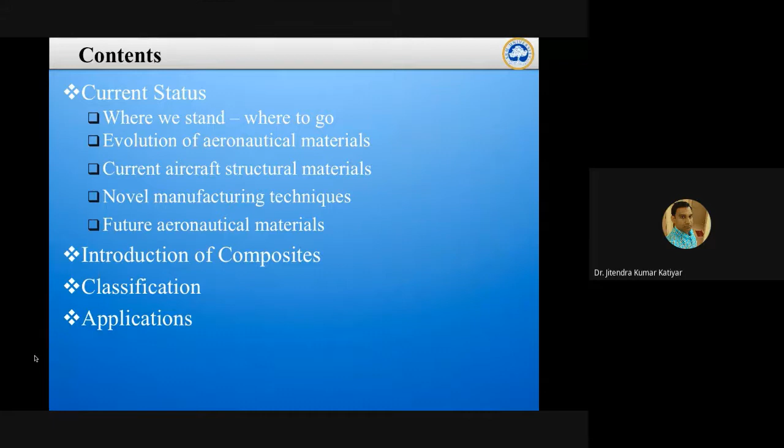So because of that reason, for this whole webinar or whole topic, I have decided on the basics of the advanced composite materials. So what the different firms are doing according to the environment also plays a very important role. We are basically moving nowadays toward the sustainability aspect or green environment, you can say.

So whatever goal we have set in 2000, according to the 2000, what is the vision in present? Our vision set in 2000 is that we can reduce the fuel consumption of the aircraft, and also we can reduce CO2 emission, because the environment is polluted. Otherwise, more CO2 will go into the environment. So that was the vision set for 2020, and as per comparison with 2020, we are in the position to at least reduce the fuel consumption and CO2 emission by 50%.

So every 20 years we have set the goal, and we have worked on it to achieve that particular goal. Like in BTech also, when you enter mechanical engineering, you have some goal. Either you want to go for higher studies, or you want to go to core companies, or whatever goal you have set. How much you have achieved after final year, that is up to you. When you sit alone and analyze yourself, how much percentage you have achieved. It will not be that you can achieve 100% of whatever goal you have set. If you have achieved 50 to 60% also, that is also a very good achievement.

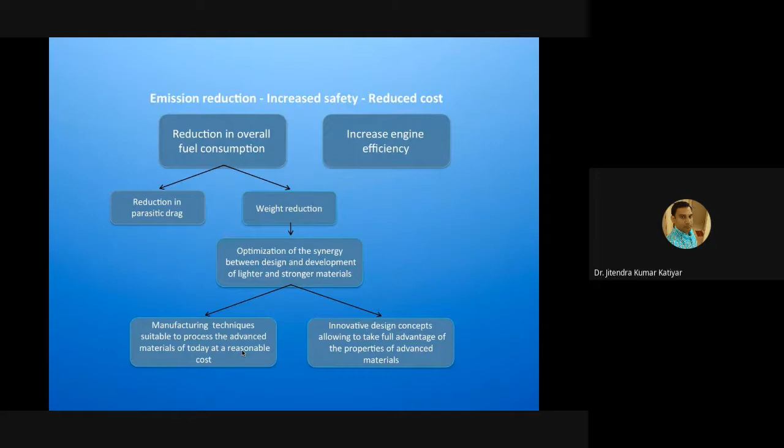And also we can talk about the material. So material science is a very important aspect in the selection of material.

Like the aviation industries, what they have decided from 2005 to 2050 is they set a goal for how much they want to improve. You can see here that we analyze per year the international aviation fuel burn, and we are targeting to at least reduce fuel consumption in that particular era.

This is called the blue solid line - it is a baseline which is fleet renewal. This green dash is the contribution of technology improvement - how much technology has contributed to developing material, design, and manufacturing process. That also plays an important role, along with the contribution of improved ATM and infrastructure used.

So ATM is air traffic management, and infrastructure which is being used - that is the solid line. The dash line is the 2% fuel efficiency aspirational goal. So we are not targeting very high, but achieving this 2% fuel efficiency is a very huge task.

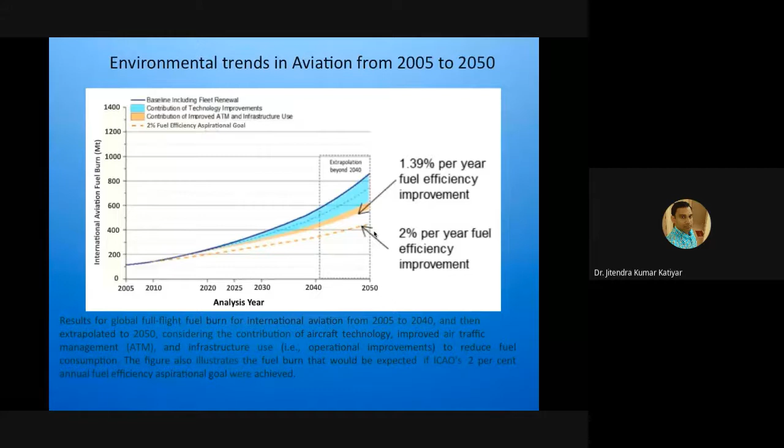Then another aspect is how much CO2 emission we are working on. This is the minimum gap into 2040 or 2050 - at least we can reduce the CO2 emissions. So the range of CO2 in that particular era is that dash line, which is what we are achieving up till here. We are targeting to at least cope up with the same.

How do we calculate CO2 emission? It is calculated by 3.16 times the fuel - how much fuel is combusted in that particular engine gives you the CO2 emissions calculation. So a minimum gap of CO2 emissions is required, and we can calculate accordingly and target in this range to further reduce CO2 emission.

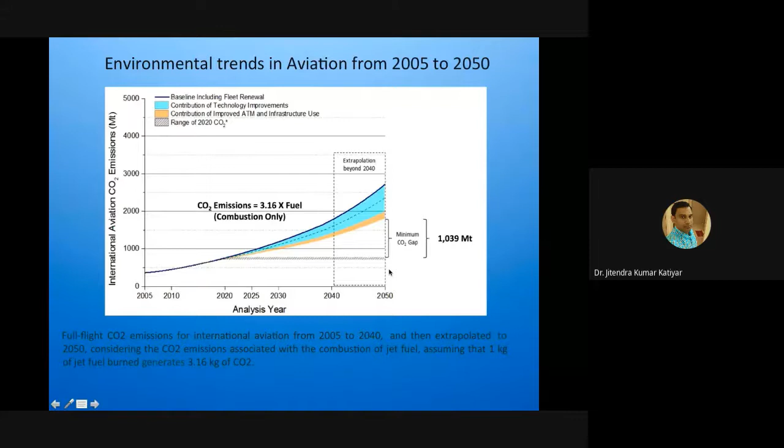So NOx emission follows the same trend - we want to reduce it up till 2040. This is an international aircraft full flight NOx, and we are going to also think about that one.

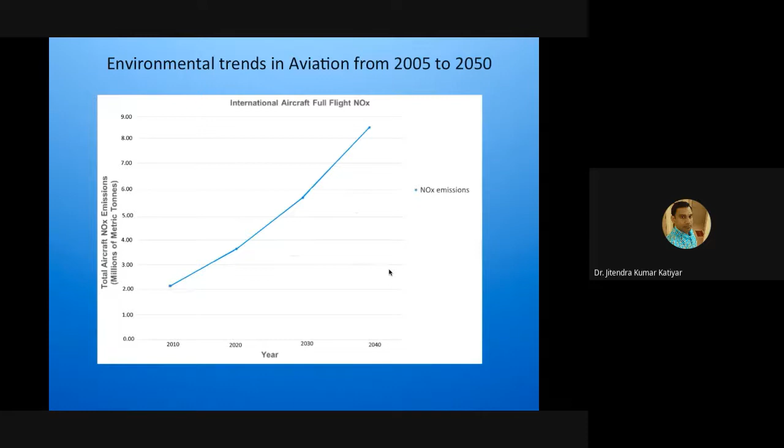So what is the flight path, objectives, mission and vision? Because each industry in the international aviation industry has its mission and vision, and to achieve those they have set environmental goals and safety goals. What they have achieved is 75% reduction in CO2 per passenger kilometer and 90% reduction of NOx.

Noise pollution is also further reduced by 65%, and aircraft movements are emission-free when taxiing. Because when you are taxiing the aircraft to the runway, more fuel will burn.

In that range, they use a cart to pull the aircraft up to the runway. Some airports are adopting this, moving the aircraft from the track up to the runway so you can reduce fuel consumption. Taxiing to the runway burns approximately 30 to 40 liters of fuel in just 5 or 6 minutes.

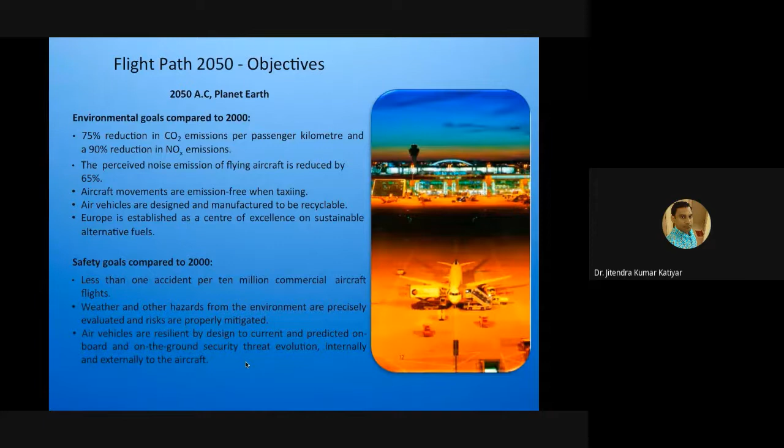These are the goals set by the International Association till 2050. Development of aero structures relies on the development of new materials with improved specific properties, like wear resistance and corrosion resistance. Lighter weight is also very important - if weight is light, you can reduce fuel consumption.

You can also develop precise manufacturing processes to design that particular nature. Specific goals include increasing the strength to weight ratio, reducing cost, and ensuring environmental friendliness. That is very important.

This picture, taken from the internet, shows a structure by nature beautifully present on a leaf - you can see some kind of flight structure there. So whatever we are learning from nature, that is the best source of learning.

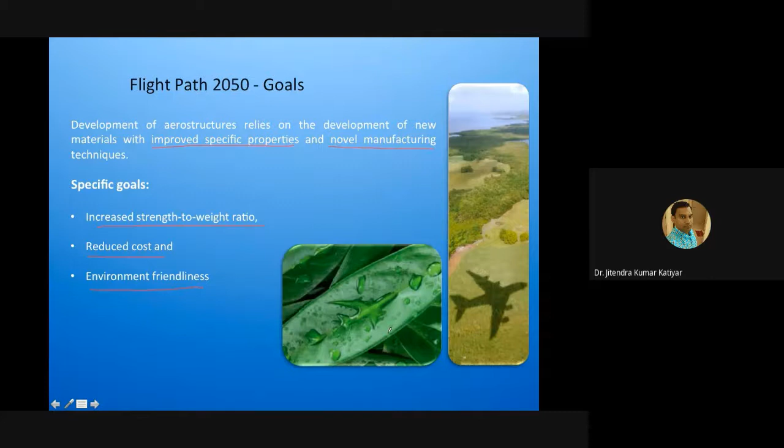Now discussing aeronautical materials - how this has developed since the beginning is very important. The Wright brothers, as you have studied, in 1903 in Ohio, USA, made the first aircraft, which consisted completely of wood, 100% wood, covered with fabric. So the first material used in aeronautical applications was wood.

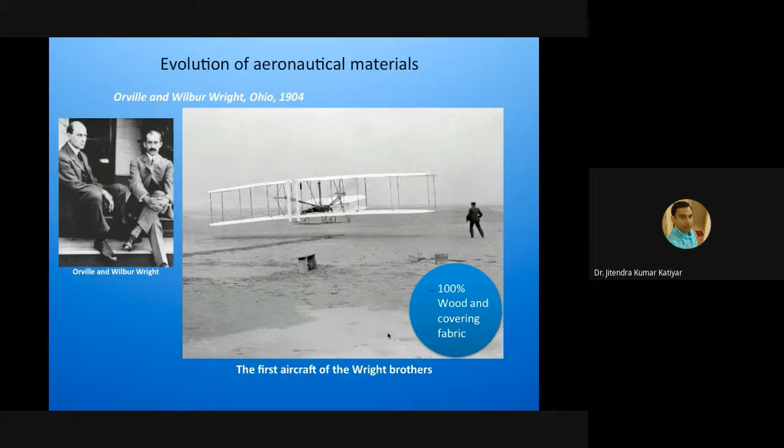So 100% wood was used in aircraft at that time. Further, because wood is not that much sustainable, during the First World War we replaced wood with steel, which provided temperature resistance and other benefits. This is the Junker aircraft, which used 100% steel. So wood was replaced, and steel came into the picture.

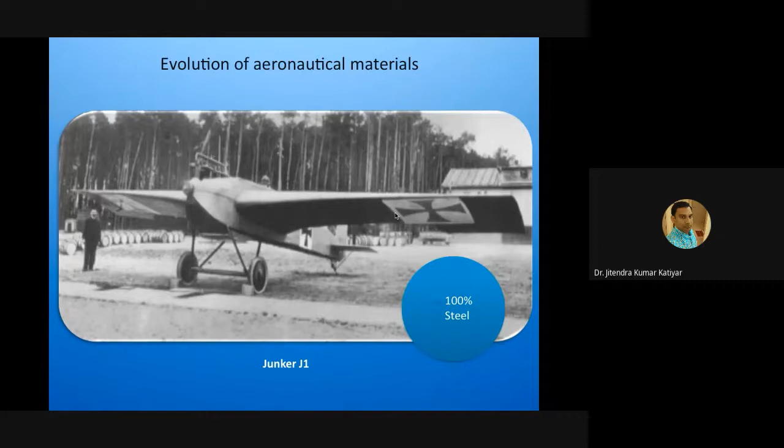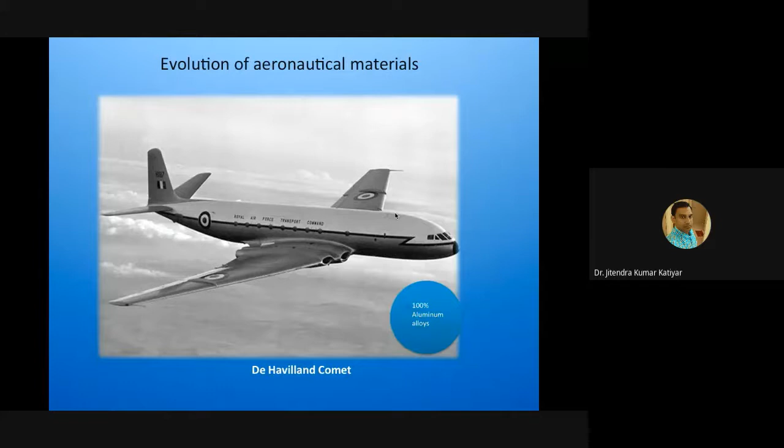You can see here an accident in aircraft Comet in 1953. Canadian Pacific Airlines crashed during takeoff at Karachi, Pakistan, and this was due to the design that was earlier there. So due to that design flaw, that accident happened. On 10 January and 8 April 1954, this led to the grounding of the entire fleet, and after design modifications were implemented, service resumed in 1958.

So there was huge human loss of life in that particular incident in 1953, because of the design flaw. So in that case, we paused these flights and worked on the design aspect, and after 5 years we resumed aeronautical services after the modified design. But we were still using aluminum.

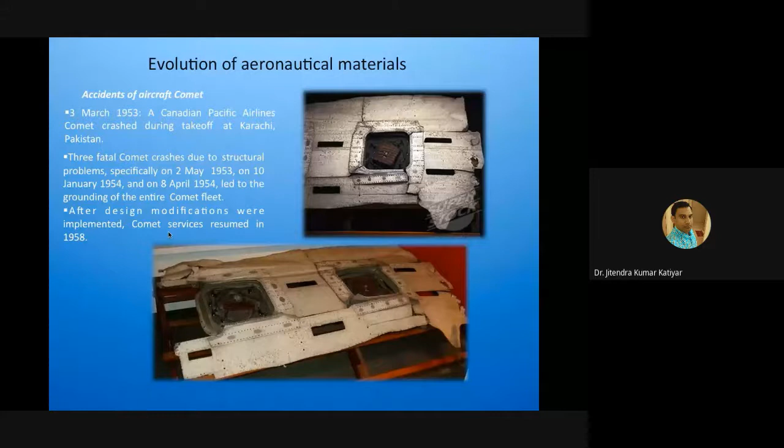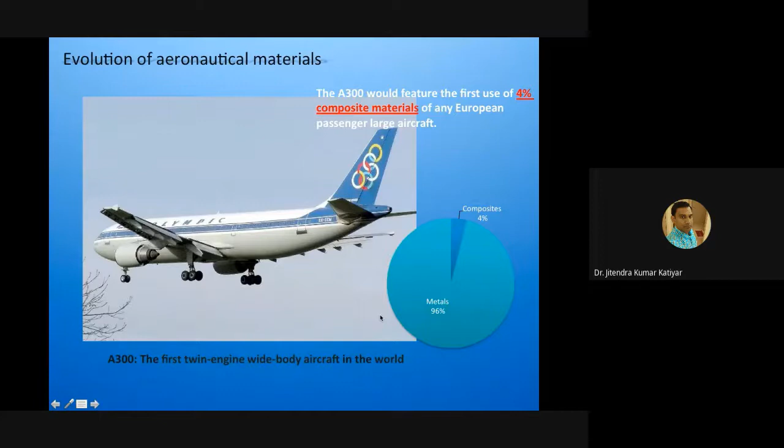Now further, the Airbus 300 came into the picture, and at that time we could reduce the metal like aluminum. So we used aluminum, but lighter because of its lighter weight, and we added at least some percentage of composite in that particular Airbus. So 96% aluminum we used, but 4% we used composite material. This is the era after 1960, where we slightly added composite material.

Further, for lightweight designs, now Airbus A320 - you have heard about that. Indigo has this old Indian Airbus A320. They are also nowadays banned by the government because of huge accidents that happened with some designs. In this Airbus A320, we used aluminum 68%. So you can see that from 96% aluminum we came to 68%, then 6%, 9%, and composite here we used 4%.

Now we use 15% and 2% material to improve corrosion resistance or wear resistance, so we add some elements in the fabrication of the material. Further, 15% composite material is used in the Airbus A320.

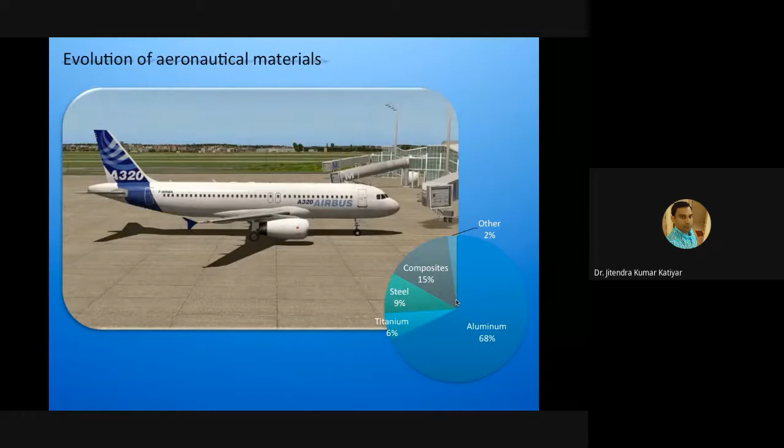So further, in the Airbus A380-800 series, whatever is going on nowadays, we are using 22% composite and 61% aluminum. So it is more lightweight than the previous era.

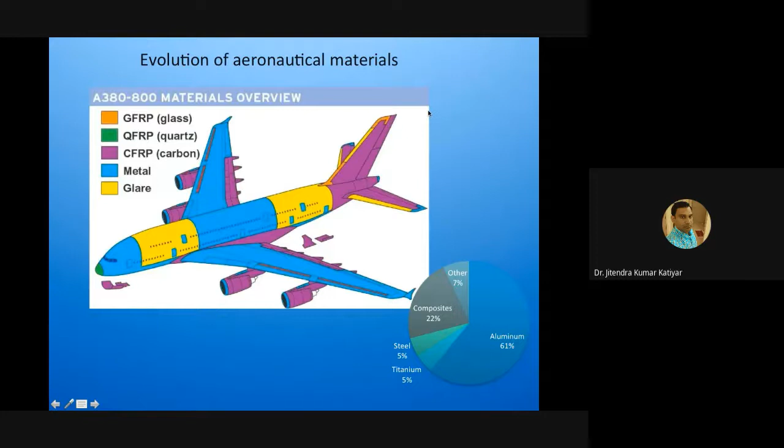So in this aeronautical material diagram, you can see the leading edge and nose, and this is the vertical stabilizer, which is made of composite. Landing gears and the body are made of aluminum alloy, and carbon fiber CFRP and AFRP are used in the jet engine and stabilizer. Titanium and steel are used very lightly. Landing gears are generally made of steel, and the engine pylons are steel and titanium, because the hinge of the jet engine is very important and must be very strong.

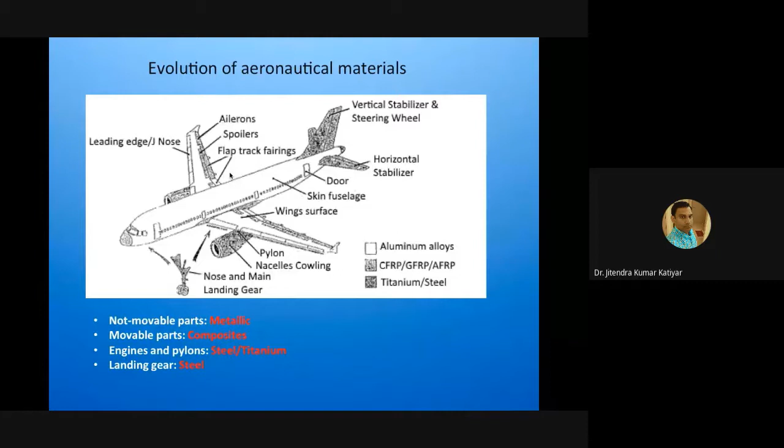In the Airbus A350, the composite location is 52% composite, with other materials making up the rest. So you can see the importance of composite material nowadays is very significant. We are focused on converting to less metal - from 96% metal and 4% composite, nowadays metal is much less, and in comparison, 52% composite is used nowadays to improve the strength-to-weight ratio and other properties, and also to reduce basic fuel consumption.

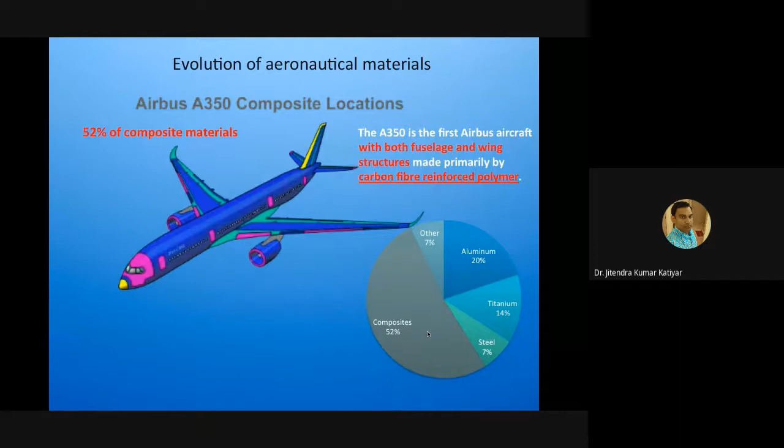So this whole body, previously you have seen that aluminum was used, but nowadays we are focusing on the composite material. So the whole body we are making with composite, and steel or titanium we are using. Like in a jet engine, this body is made of steel, but this steel is hinged by titanium. So if some fire hazard or accident happens, it will not easily fall down because titanium's temperature is very high. So this is the body structure of the Boeing 787.

So nowadays the Boeing 787 is going on. It is running in the airport. So 787, 777, these types of aircraft are very safe, lightweight, with less fuel consumption compared to earlier, and very less consumption of metal. This composite can be easily degradable. It will not harm the environment. But our goal is furthermore.

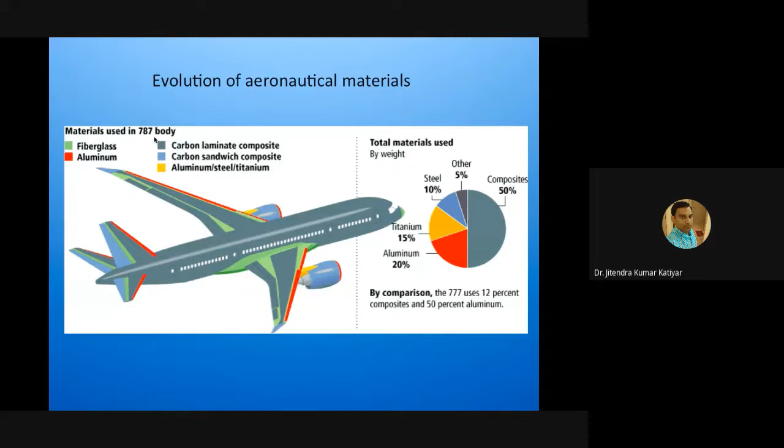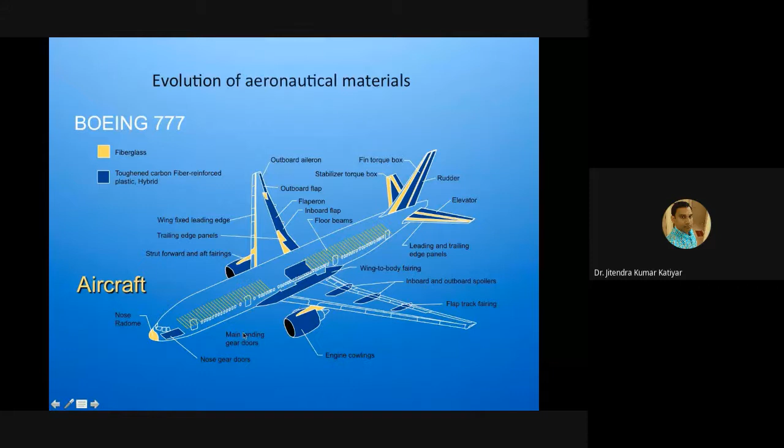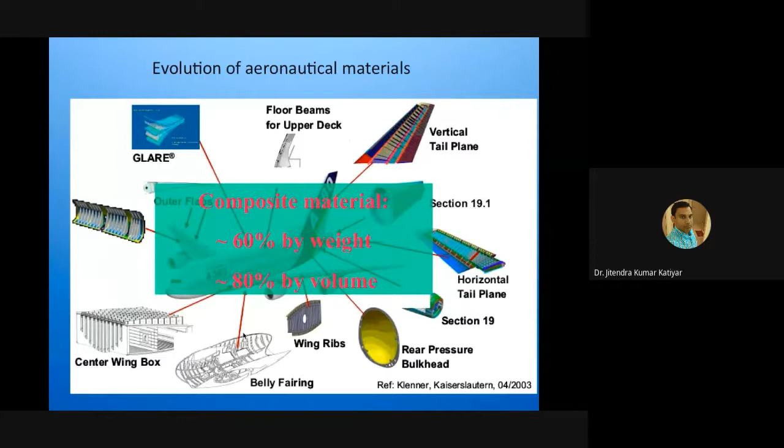So this is the basic structure of the Boeing 777, where fiberglass is used, and toughened carbon fiber and hybrid composite we are using in this particular one. This is another view of this particular Airbus. So what materials are we using? Generally in this type of Airbus, as I told earlier, 60% by weight or 80% by volume we can use composite material to fabricate this Airbus. So weight reduction is very, very important to reduce fuel consumption.

So in commercial aircraft industries, you can see that initially very little composite was used, but nowadays we are using 50 to 70% composite material, and our target is to use 70 to 80% composite material up till 2030. That is the target of the aviation industry. So composite is very, very important; it will reduce the weight, and it can be easily recycled, so it is environmentally friendly, among other applications. But we need to research.

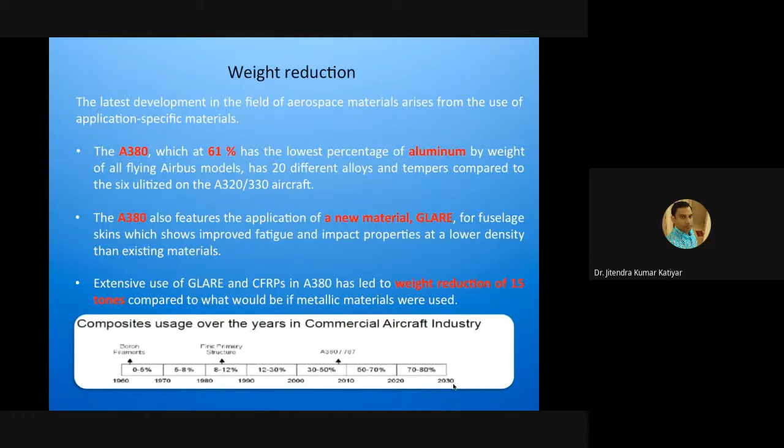So we are now in this situation with biodegradable composites, or you may have heard about biocomposites. A biocomposite is easily degradable in the environment; it will not harm it, so it fulfills the sustainability goal. But sometimes this biodegradable composite is not that thermally stable. So in the future we add some types of hybrid reinforcement, and we can make it more wear resistant and more corrosion resistant.

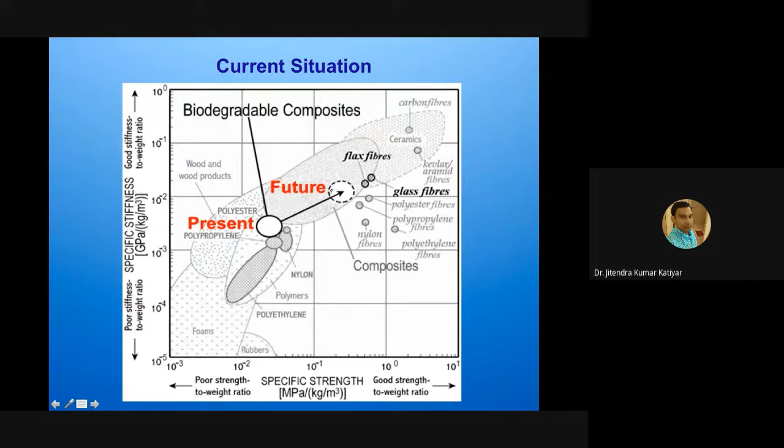So this circle is the basic future of the material, where we can mix with glass fiber, polypropylene fiber, or nylon fiber. We can mix 2 or 3 reinforcements; that is called a hybrid polymer, or hybrid composite. So we add Kevlar, aramid, and mix with carbon fiber and other composites. So what is the strength? Nowadays the current research is going on in hybrid composites.

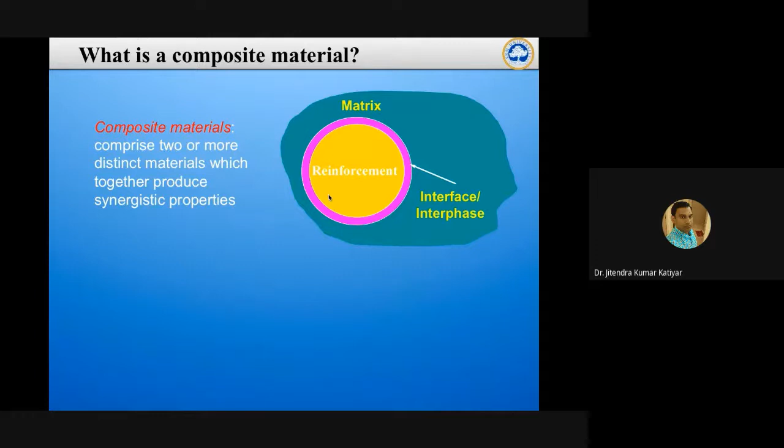So one question comes to our mind: what is a composite material? It is the mixture of 2 or more distinct materials which can produce synergistic properties. Maybe the matrix has some property and the reinforcement has some property, but when you mix them together, it gives you a property which is different from the parent materials and much better than them. That is known as a composite material.

Another question will come to your mind about alloys. We mix 2 or 3 elements and make an alloy. In a composite we also mix 2 or more elements or materials. Then what is the basic difference between alloys and composites? You can easily identify it. An alloy is a homogeneous material or homogeneous structure, so when you cut the material, each slice is the same type with the same density. But a composite material is a heterogeneous mixture.

And when you cut into slices and observe the density, each slice has a different density or different property. So that is the basic difference between alloys and composites. A composite gives you properties in one direction. In one direction it gives you very excellent properties, and in another direction it may not give good properties. So that is a composite material.

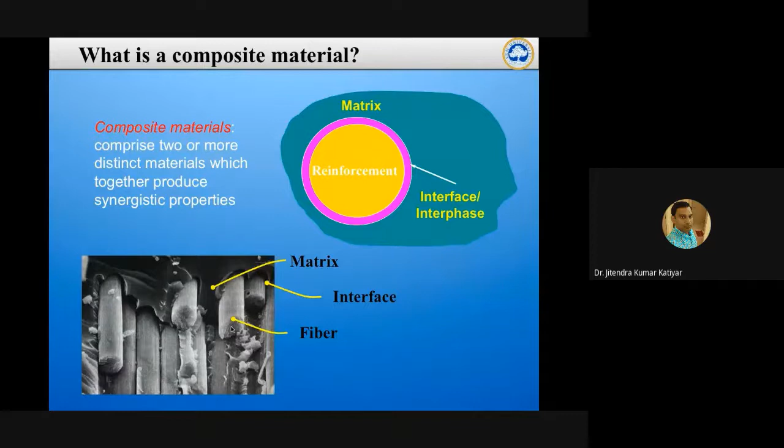So this is the composite material where we have short fiber or long fiber and we mix it with the epoxy matrix. The matrix is what supports the reinforcement, and the reinforcement is used to hold the load. Whatever load is applied on the composite, they support the matrix by holding the load.

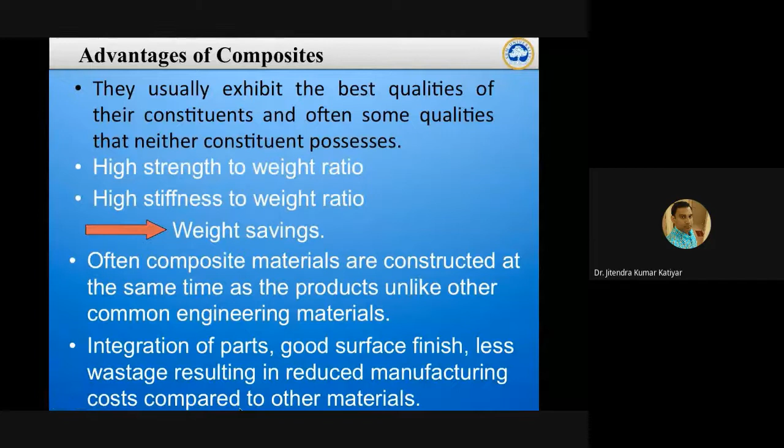Advantages of composites: they give you a high strength to weight ratio and high stiffness to weight ratio, so you can save weight, and finally it will reduce fuel consumption. Also our main aims were good surface finish, less wastage, and reduced manufacturing cost compared to other materials. Those are other good things about composite materials.

And you can tailor the material properties by adding different types of filler inside the composite material: the type of fiber and resin, the proportion you are adding, and the direction of the layers or reinforcement. In that way you can tailor-make the properties. Composites also give good fatigue properties, good thermal stability, and are very helpful for thermal and acoustic insulation.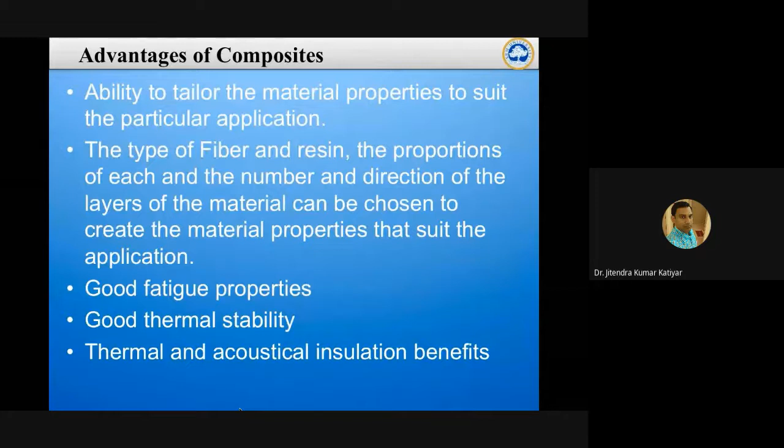Because of that, composites are nowadays widely used in the aviation industry, and the target is 70 to 80% composite, with very little metal used. But the problem with composites is their anisotropic behavior: they give good behavior in one direction, not in all directions. Isotropic means the property is the same in all directions, while anisotropic means it is good in one direction, not all. That's why it is a heterogeneous mixture, and isotropic material is a homogeneous mixture.

Composites are also very sensitive to humidity, and properties will vary if humidity varies. And for stress concentration, test methods are not fully mature; complete test methods are not developed for composites. Research is still going on, and we are developing different testing methods for composite materials as per our requirements.

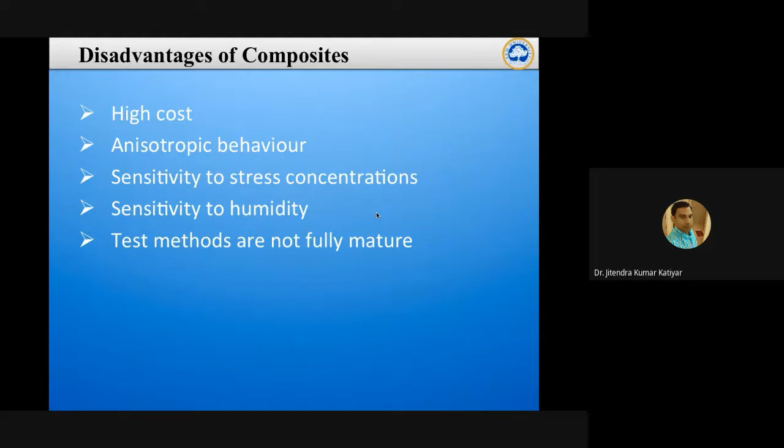Composites can be classified into two basic groups: by matrix type or by reinforcement type. By matrix type, there are three types of composite material: polymer matrix, metal matrix, and ceramic matrix. The matrix is the constituent with the higher proportion compared to the reinforcement. If the composite consists of more polymer, it is known as a polymer matrix composite; if metal, a metal matrix; if ceramic, a ceramic matrix.

Reinforcement can be whisker type; a whisker is a kind of triangular shape structure. Particle type, using nanoparticles, microparticles or macroparticles. Fiber type, using continuous fiber, short fiber, or hybrid fiber; continuous can be unidirectional, bidirectional, aligned, random, oblique, or orthogonal. And structure type: laminate structure or sandwich structure.

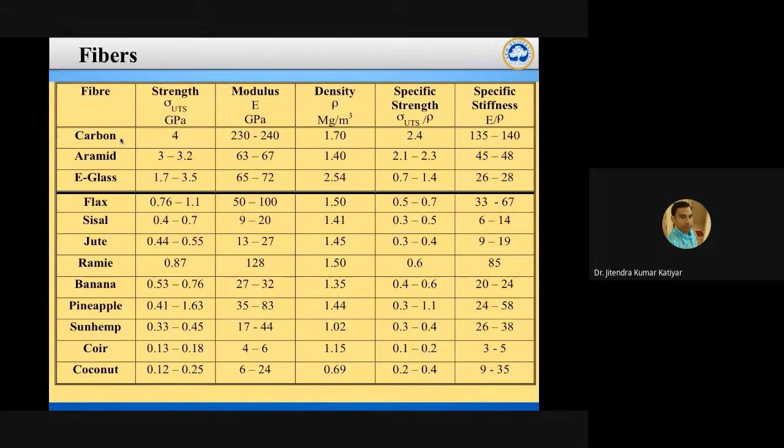Here you can see carbon fiber gives more stiffness and strength. So if we add carbon fiber in epoxy, your material strength or mechanical property is similar to metal. So in this way we play with composite material. Carbon fiber reinforced composite is widely used in manufacturing aerospace structures because of these good properties.

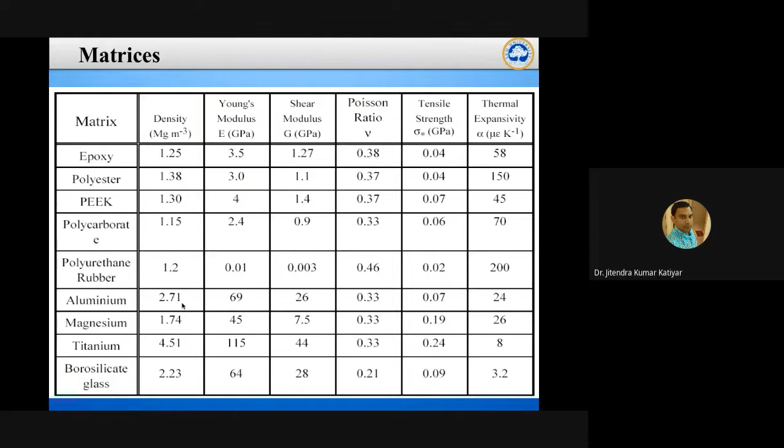So metal is not that much used. Metal matrix composite is used in brake material, in high speed cars and landing gears, which are prepared from metal matrix composite. So these are the various properties of the matrix and of the fibers.

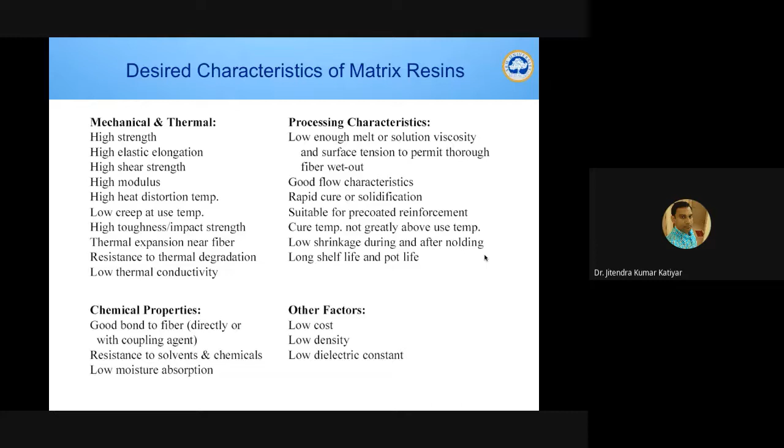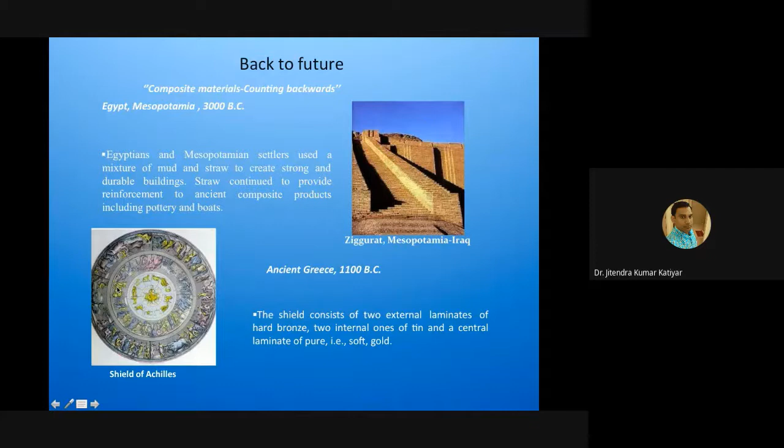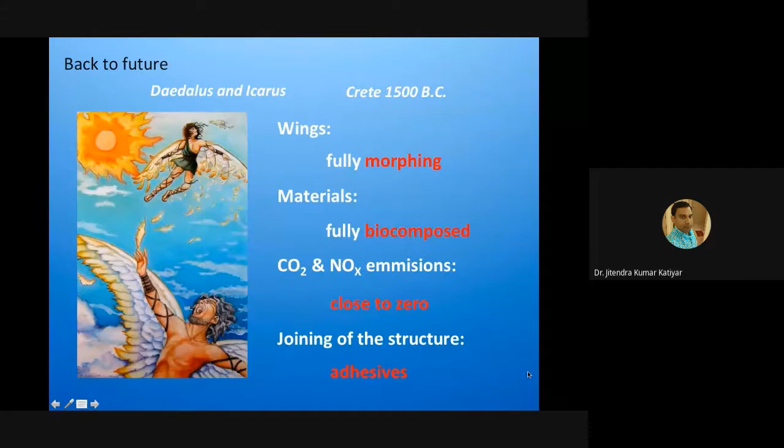Also, due to emission of CO2 or NOx, we need close to zero, bio-composites, or fully morphing structures and joining the structure by adhesives. After the development of glue in polymer, people are using that type of structure. So the lightweight structure design philosophy comes: a lightweight structure is a matter of design, not a matter of weight. If you design properly, then your structure will also be proper.

How can you reduce the weight? How can you design properly so that your specific Young's modulus, specific yield strength, specific tensile strength will be more? Ductility and fatigue behavior are also essential concerns when you design any structure. So for lightweight structures, don't think that we only reduce the weight of the material; it is basically focused on the design aspect. If you properly design it, it will be lighter. For example, in real life nowadays, you can purchase a phone of the same size, an Android, a Redmi phone, or an Apple iPhone.

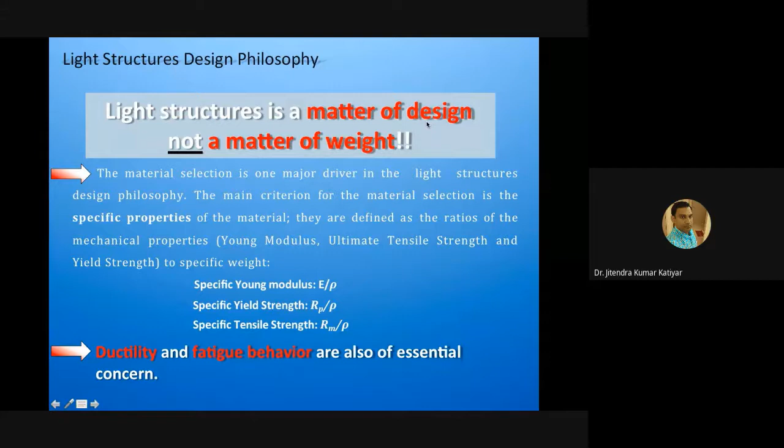The weight is much lighter in the Apple iPhone than in other phones. Why? Because they have designed the material or the structure in such a way that it is very light. So that's why this line is very important. Don't think that a lighter structure means you can just reduce the material. We can't simply reduce the material; we design it in such a way that it gives you a light structure. So design engineering, or the design engineer, is very important in any aspect.

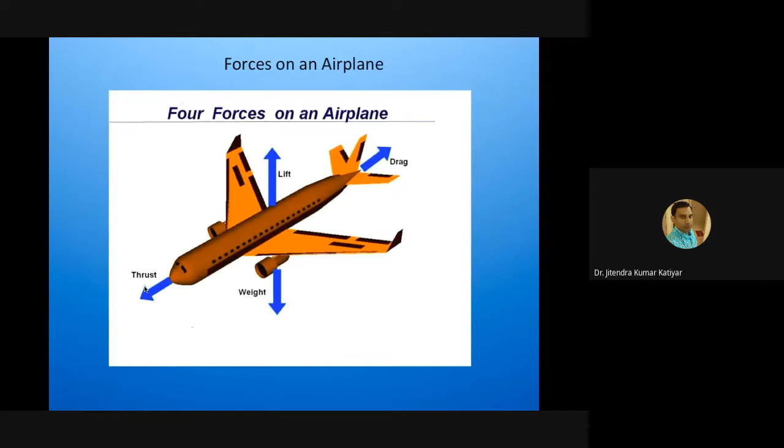So when we talk about the forces on the airplane: lift, thrust, weight, and drag. Lift lifts the airplane, and thrust gives the forward motion of the plane. So these are the four forces which are very important in an airplane, and when we design the material, we take these four forces into account.

In strength of materials, I think you have studied hoop stress, thin and thick cylinders. That is very important: how you design the t/D ratio, thickness and diameter, so you can control the hoop stress and compression. So these are the different types of stresses which are very important in aircraft structure design.

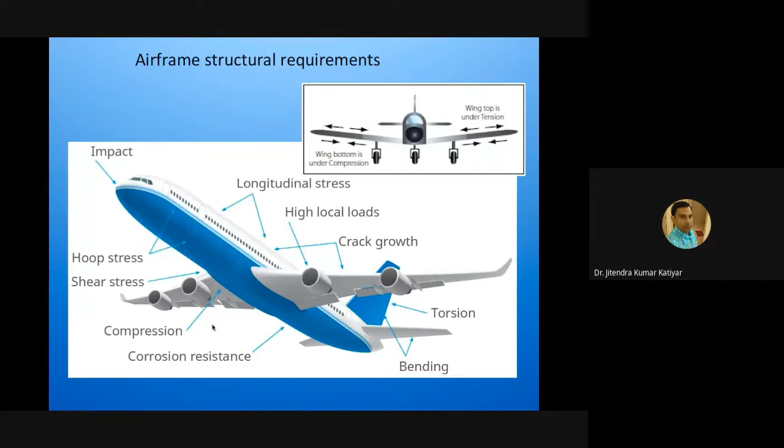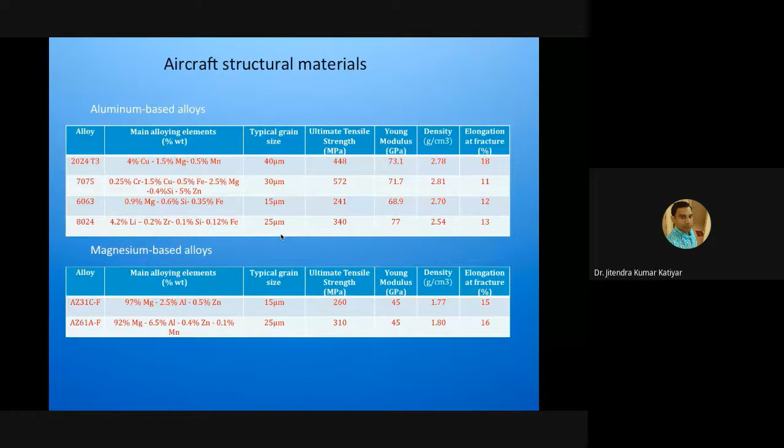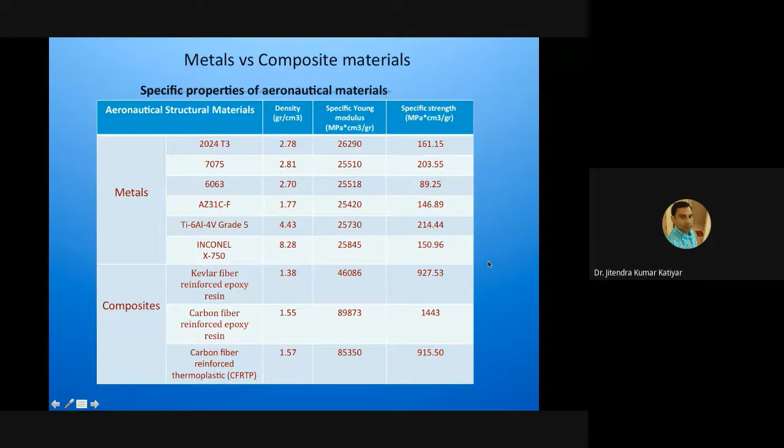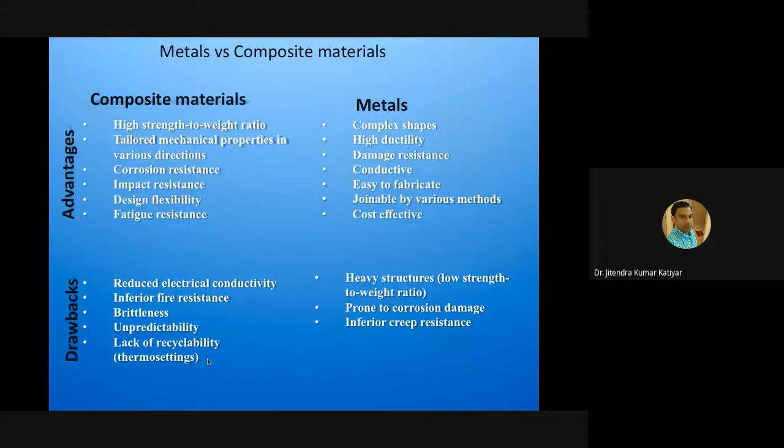Composites give you all these properties, but composites are unpredictable. You can't say they will be 100% perfect. They are brittle in nature, and if you use thermoset plastics, recyclability is not good because thermosets are not recyclable. So proper selection of the matrix is very important.

Thermosets are properly cross-linked, while thermoplastics, when heated, can regain their shape by removing the cross-linking. That is the basic difference between these two types of material widely used in fabrication of polymer matrix composites. But thermosets have more thermal stability compared to thermoplastics. The problem is thermosets cannot be recycled, but thermoplastics can.

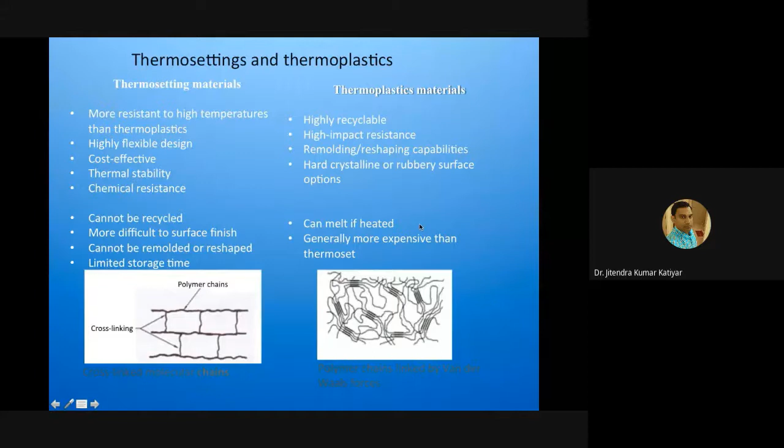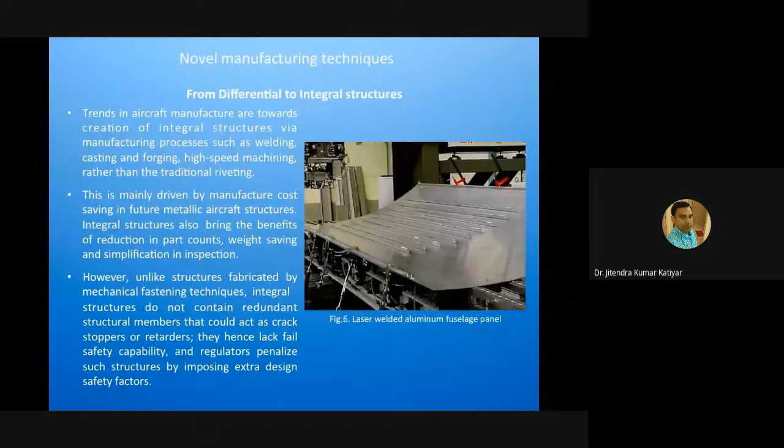Novel manufacturing techniques are very important to make panel structures. This is a picture of a fuselage panel manufactured by novel manufacturing techniques like spin forming process, an advanced metal forming process. Spin forming process, superplastic forming, explosive forming, electromagnetic forming, electrohydraulic forming - these help us form sheet structures. These advanced or modern manufacturing techniques are very important in aircraft manufacturing.

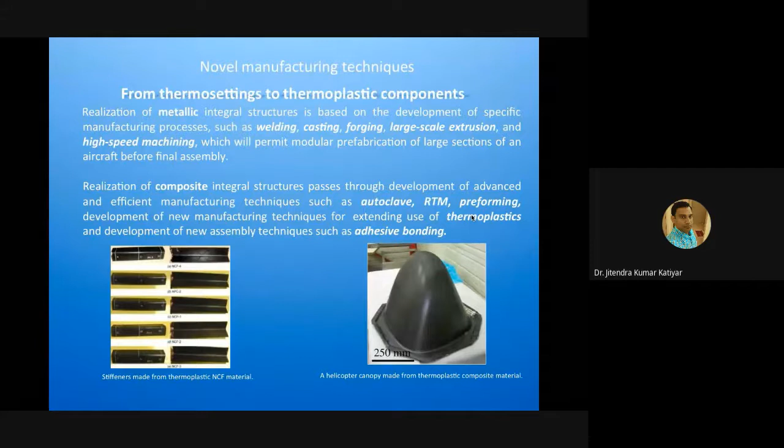This type of helicopter structure can be made by thermoplastic, so we make it using forming processes. There are different types of advanced composite manufacturing techniques like autoclave, resin transfer mold process, and preforming process. These are the various composite processes we use to manufacture composite material or composite structures.

We are also targeting future aeronautical materials like smart materials which can be easily self-healed - self-healing composite material. They use some types of bubbles, and when cracks are initiated, due to those cracks these bubbles, whatever reinforcement or matrix is there, burst and fill the material itself. That is called a self-healing material, and these are called multifunctional materials.

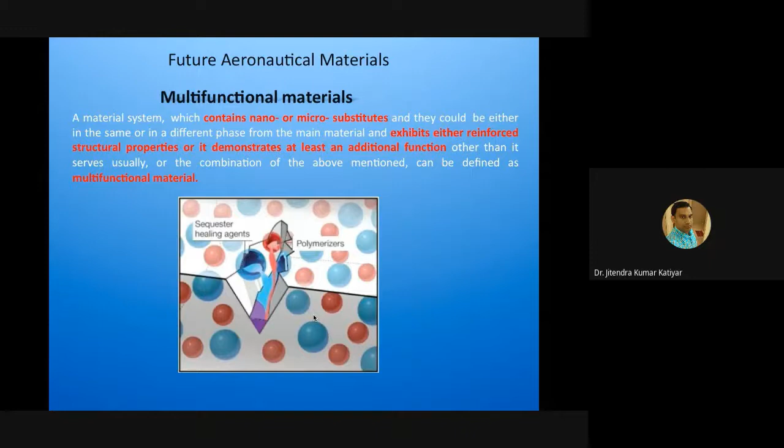This type of material also needs to be used in aeronautical applications, but research is still going on.

Carbon fillers include graphene, graphite, multi-wall carbon nanotube, and single wall carbon nanotube - these are carbon structures. Graphene is stronger than the others, so we mix graphene inside the material to improve its properties.

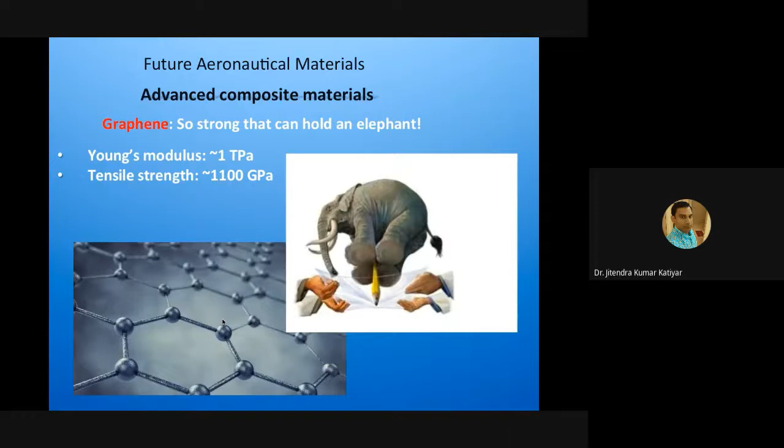Carbon nanotubes have cylindrical structures, so they can create rolling friction. Since sliding friction is more than rolling friction, they create rolling friction and can also reduce friction. These are further advancements in composite material - you can add carbon nanotubes and graphene to improve the properties.

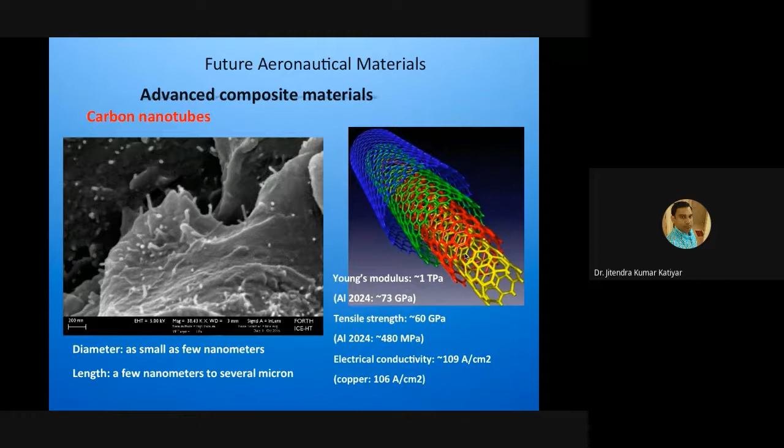Self-healing properties are another important aspect. The structure of the polymer is susceptible to cracks, and these cracks can propagate. Catalysts and microcapsules are inside the material, and when a crack propagates, these microcapsules burst and heal the material, giving proper bonding. These are called self-healing properties, similar to what you see in Hollywood movies where they self-heal the material or body - whatever damage occurs is immediately self-healed.

To take advantage of the improved properties of multifunctional material, we need to assess the effect of additives on mechanical behavior and possible degradation of mechanical properties like strength or fatigue. New multifunctional materials reveal the significance of production quality on the entire multifunctional material concept, which directly affects the degree of internal defects.

We also talk about cost effectiveness, which is very, very important. When we discuss any material or manufacturing process, we also work on cost - reduction in cost is very important. By properly designing and using the material effectively, you can reduce the cost. If you can minimize wastage, you can reduce the cost, and if you can properly organize assembly lines, you can also reduce the cost.

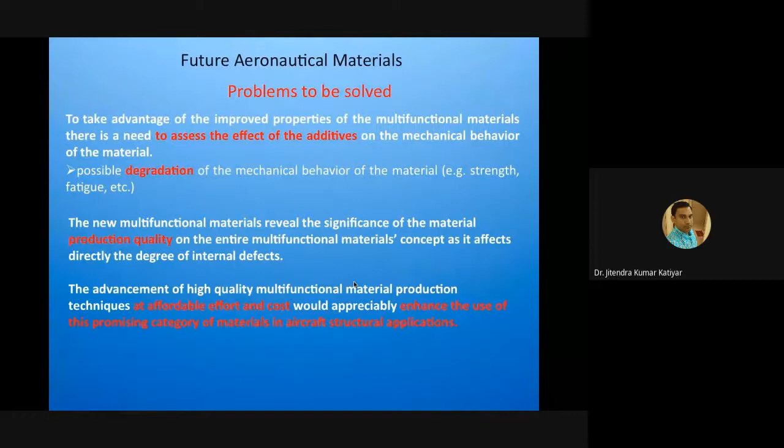So that's why in industrial engineering we also studied line balancing, how material flows from one station to another. That line should be properly balanced, which can reduce the time - this is the work study, time study, motion study that you studied in industrial engineering.

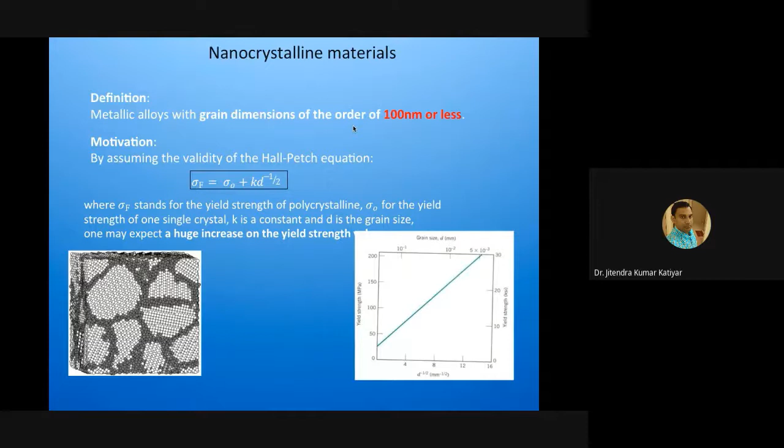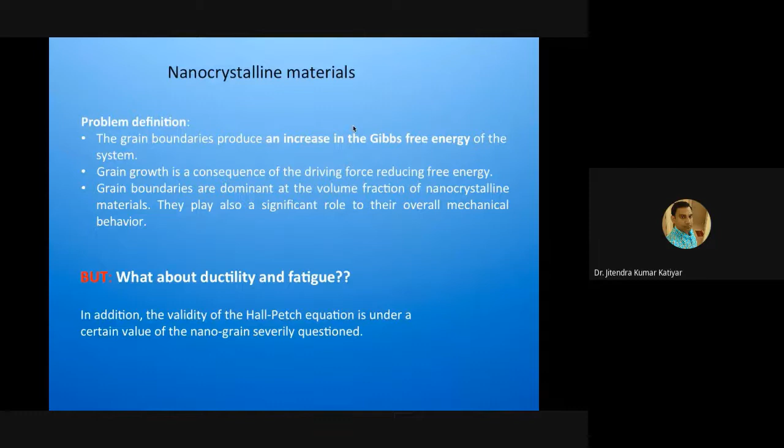So nowadays nanocrystalline material is also used. It is a metallic alloy with grain dimension of 100 nanometers or less. These are called nanocrystalline materials, which give very good properties in composite materials. But the problem is that nanocrystalline material can make the structure brittle, so we can work on the ductility and fatigue aspects of nanocrystalline material.

We can work on the thermodynamic mechanism and kinetic mechanism. But the advantage of nanocrystalline is significant - it gives greater mechanical properties compared to metal at ambient temperature. Ambient temperature means 25 to 30 degrees centigrade.

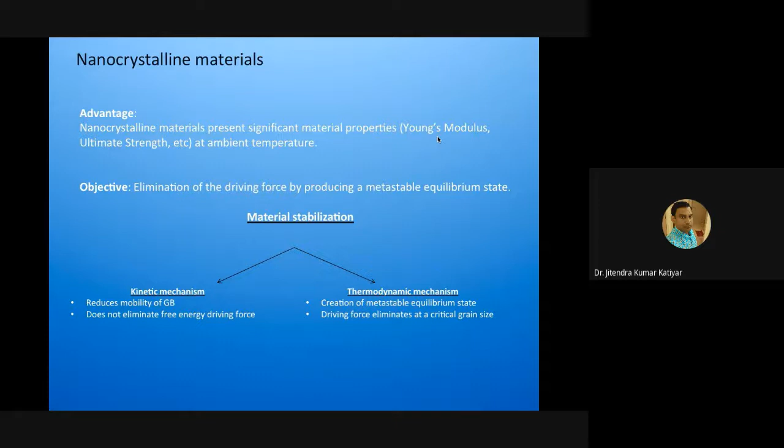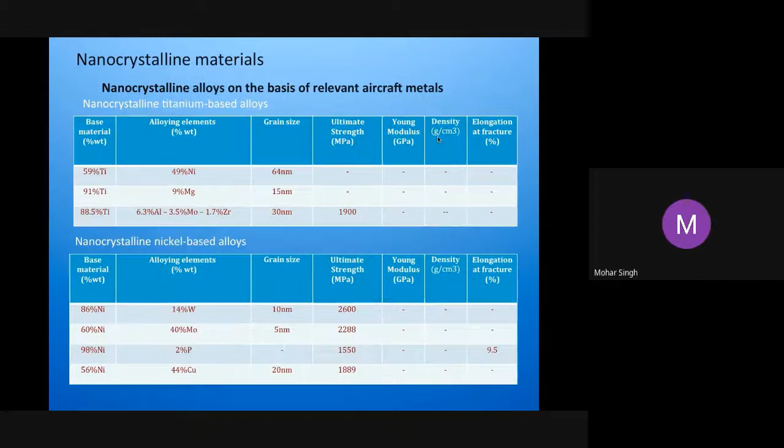So we add nanocrystalline material to fabricate aluminum alloys, like high entropy alloy. You have heard of high entropy alloy, where we use it to improve temperature property and other properties by mixing the nanocrystalline material. These can be used in nuclear reactors and other space industries. Alloy is very, very important. There are various forms of addition in which you add the nanocrystalline material in nickel or titanium, according to the property required.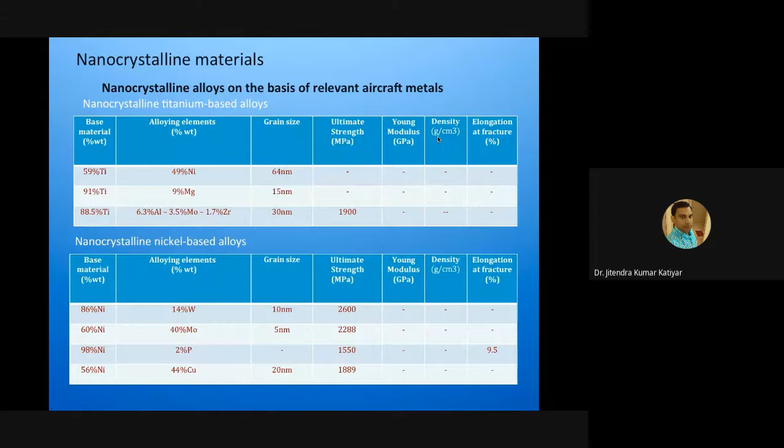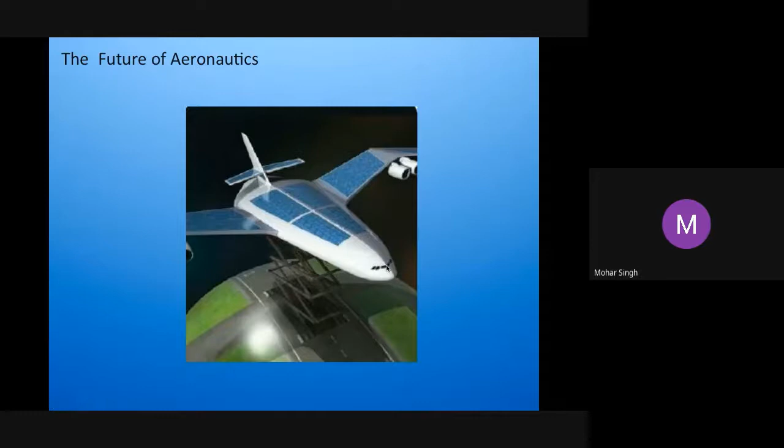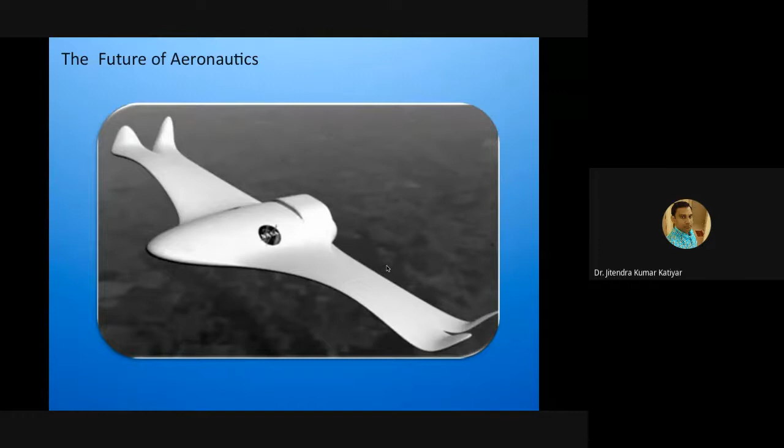So the future of aeronautics - you can see this is the future of aeronautics. This is the NASA plane in space. This is another future.

Mohar, please mute yourself, unmute yourself. Sorry, mute.

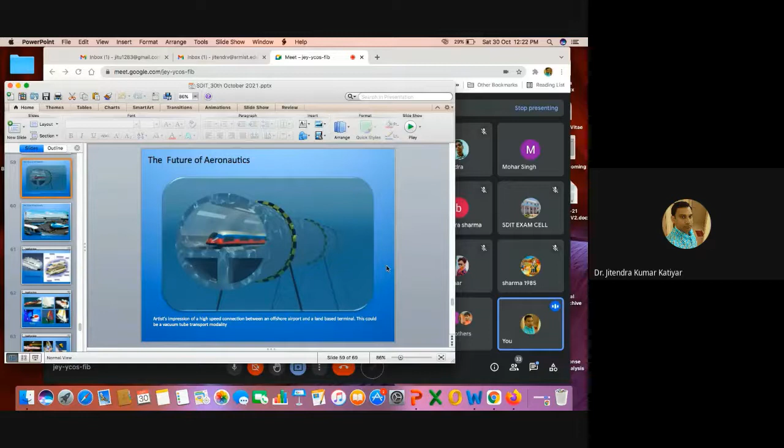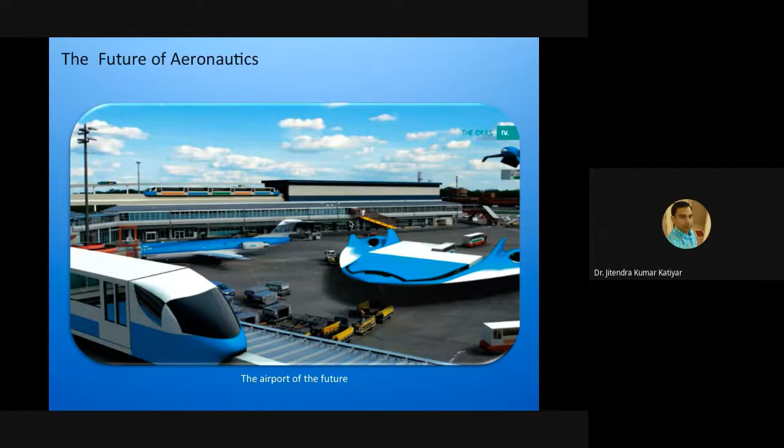So inside the sea also you can make a tunnel. That tunnel can have corrosion resistance and other good properties, so you can move from one position to another. This is the future of aeronautics - you can use the monorail in the plane and other things. So these future airports up till 2050 - international aviation industries are thinking like that.

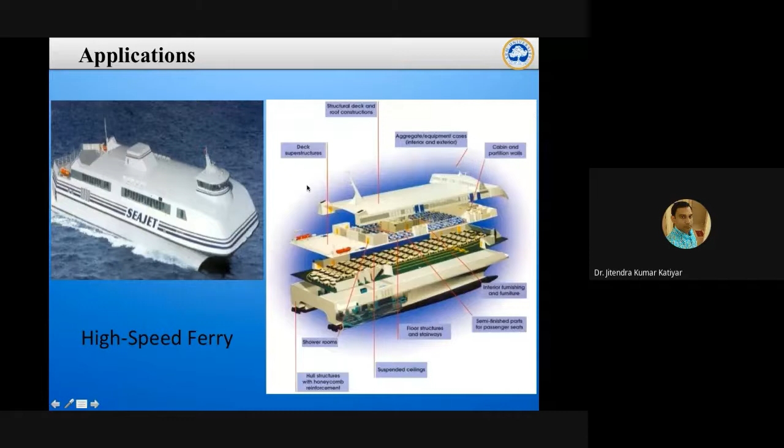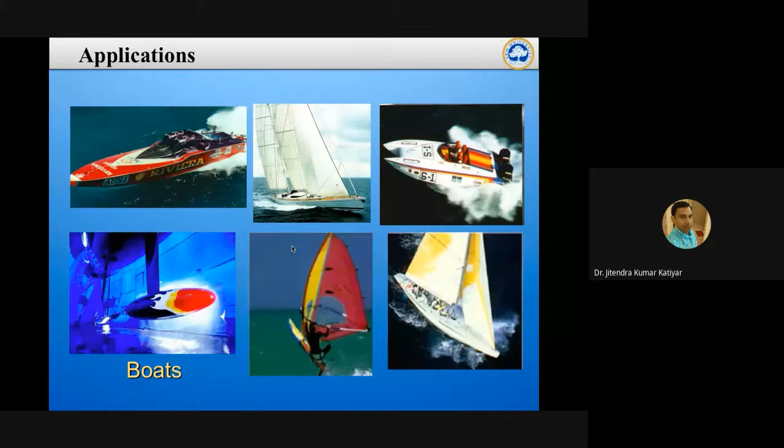And the application of composite material is very wide. In the ship industry, we are making ships in different layers of composites according to applications. In boats also we are using composite to reduce weight. In sports equipment also we are using it - if you purchase a Yonex badminton racket, it will be much lighter weight compared to a common one. So they all use composite.

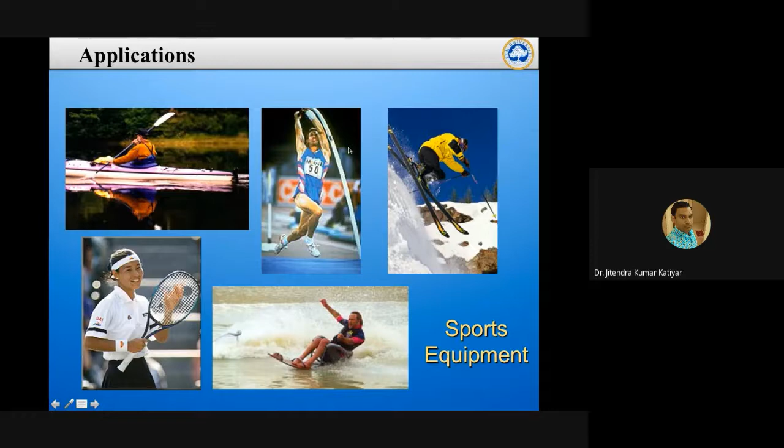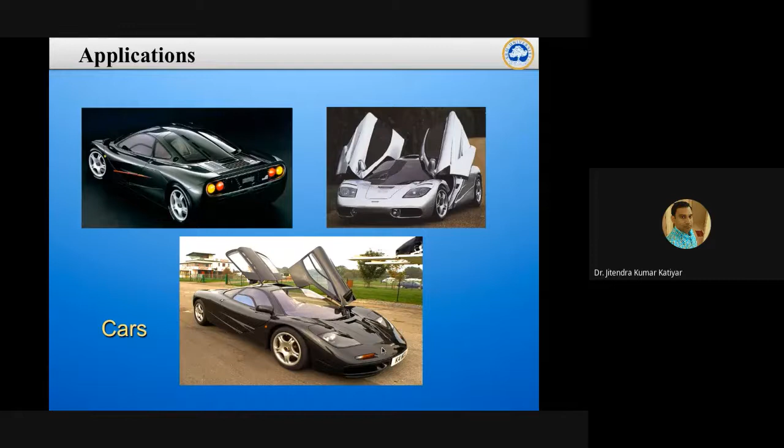In future, car bodies are also made from composite, like Rolls Royce or something, but the cost of those cars is very high, so it's not easily purchased by common persons. In automobiles also, composite bodies are widely used to improve the structure and improve fuel efficiency. So those type of cars are very costly.

Another application is in power generation - when we talk about wind turbines, the turbine blades face more impact from wind, so we can improve fatigue strength and impact strength. We can use composite material in the design of these wind turbine blades.

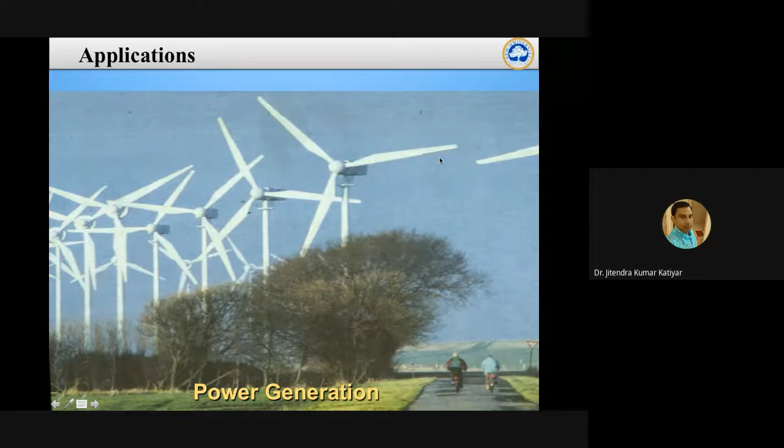Further, in building and structure also we can use composite material, like in seashore structures. You can make this composite material so that it will not corrode, and these are used in petroleum industries. You can make this homemade composite structure near seashore areas where there is more earthquake or flood risk. This temporary structure is very beautiful and you can sit in it.

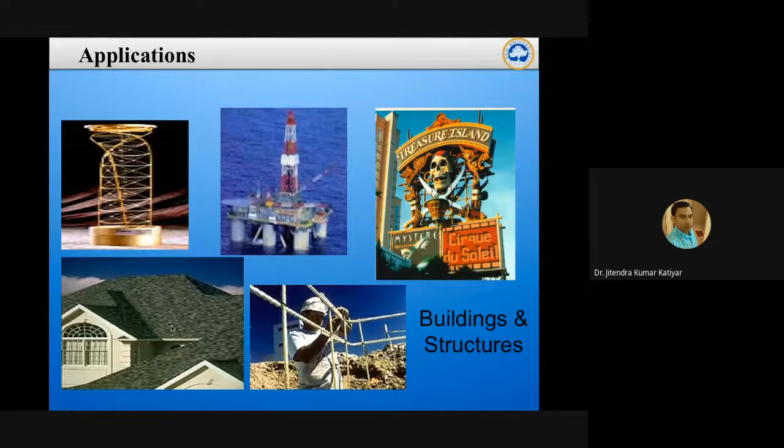Like in European countries, we are using mostly composite material for homes also. Bridges also we can make by composite material - this honeycomb structure you can see. In this case, you can reduce the material used to construct the bridge, but it can sustain more load compared to previous bridges. So composite material is widely used in bridge applications also.

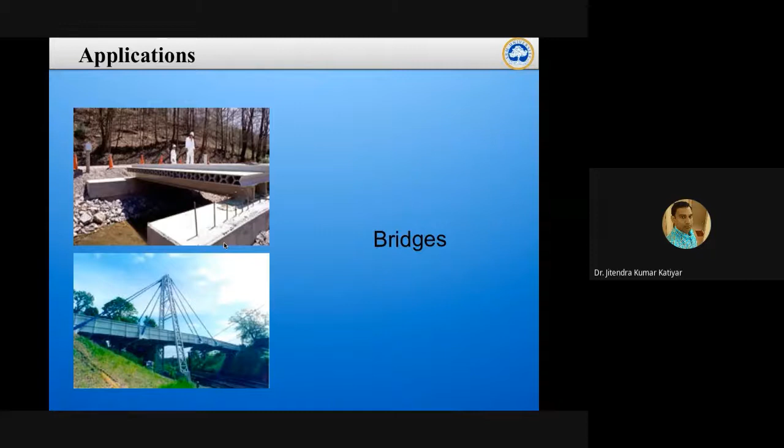So this is the basic introduction about the different materials used in the aerospace industry, and there are various applications of composite material in various fields. Thank you very much.